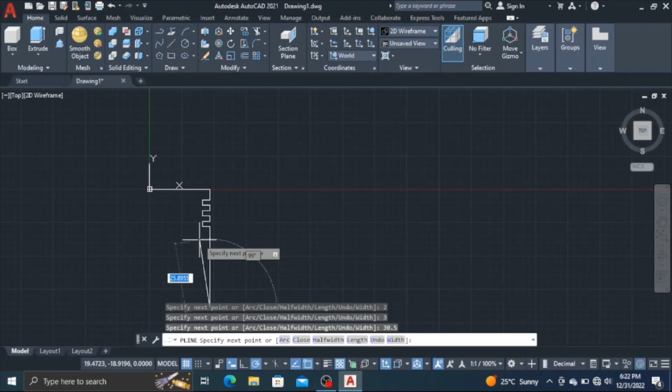Now bring it to the origin and slowly move down for the visibility of the tracking vector, but don't click until both tracking vectors appear. Click, and then click on the origin. Then press enter to exit the command.

Now we are going to use the fillet command. Enter radius 1, press enter, and select the lines you want to fillet. Then go to the modify panel and click join to join the whole geometry into a single polyline.

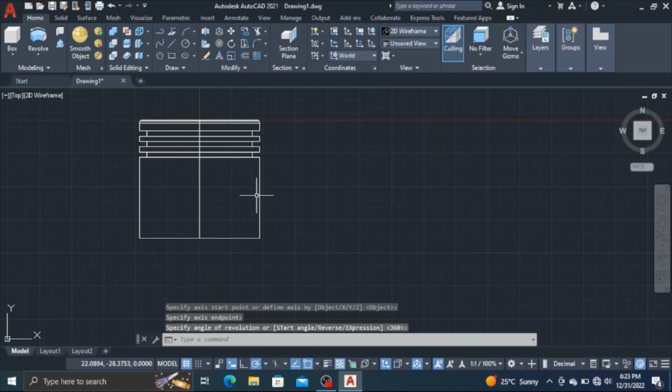Now go to the revolve command, select the object, press enter. Now specify the first point, click, and then on the second point click, and press enter. Now we don't need this geometry, so we are going to hide it.

Now again go to the polyline command, enter coordinates 0,0 to start from the origin. Now bring it downward for 4 units, and then to the right for 18 units, and then again downward for 12 units.

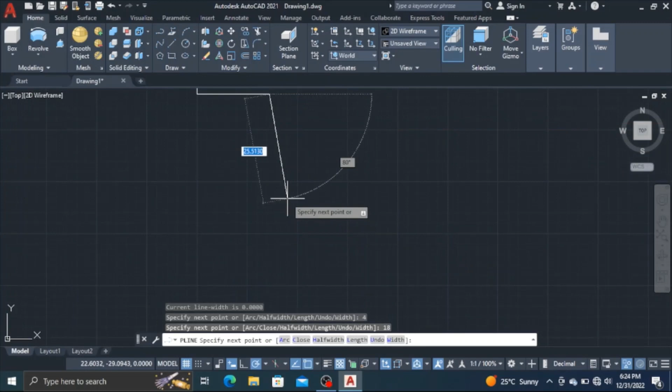Then left for 8 units, then again down for 12 units, and then to the right for 10 units. Now bring it down up to 4 units, and then 1 unit to the left, and 1 down, and 1 to the right. Now bring it all the way downward up to 30 units.

Now again move it to the origin for the visibility of the tracking vector. Move it down slowly and click, press enter.

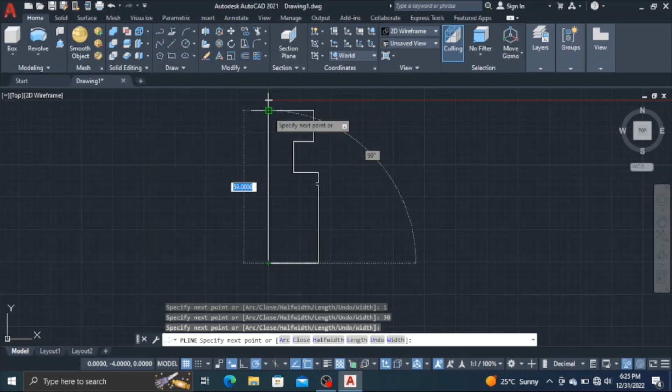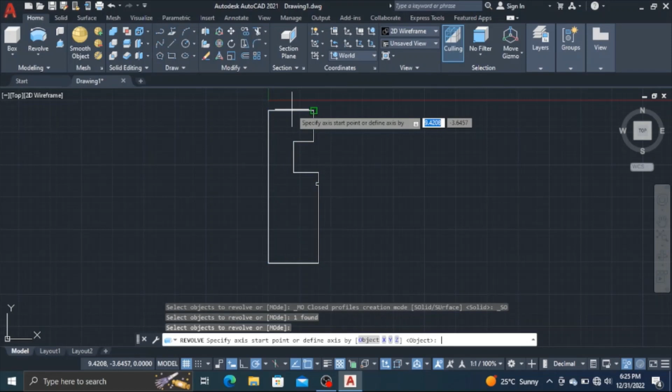Now you are going to use the trim command, press enter, click. And now we are again going to use revolve. Select the object, press enter. Now specify the initial point, click, and now the end point.

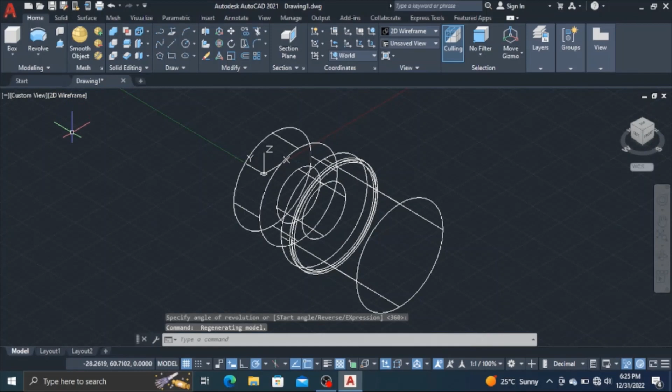Click and press enter. Now go to the home button. Change this 2D wireframe into shaded. Turn off the grid because we don't need them, and end the object isolation. Now we need to subtract this geometry from this geometry. So press enter.

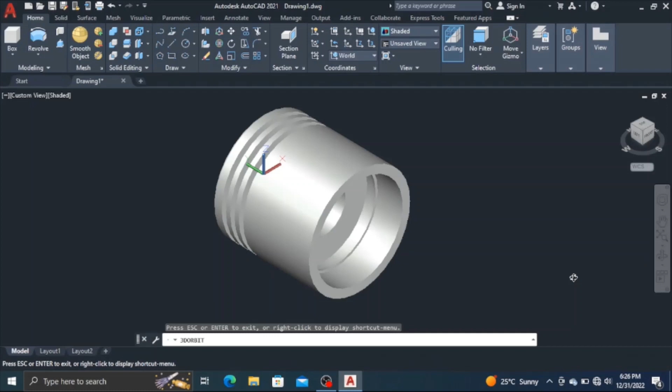Now this really looks like some piston, but we have not done yet. Now go to the top view, select the object and again hide it because we don't need it at this time. Now again go to the polyline command, enter 0,0 to start from origin, bring it all the way downward.

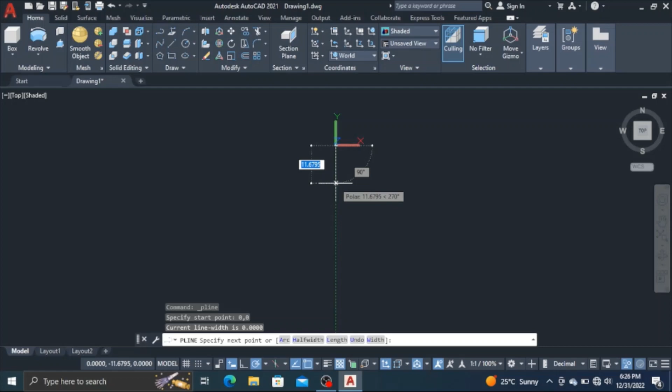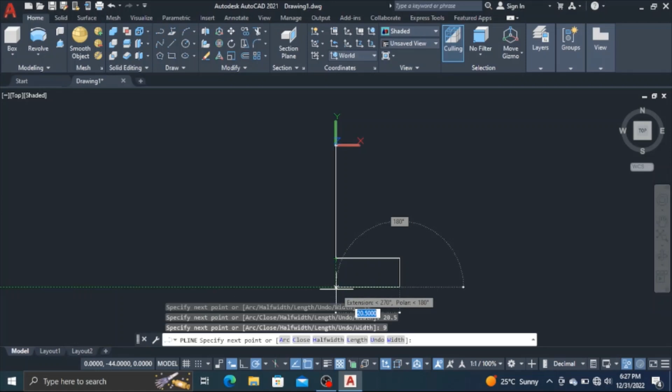Up to 35 units, and then towards the right for 20.5 units. Press enter and now down for 9 units. Press enter. Now go for the tracking vector, click and then click, and press enter. Now we are going to use the trim command.

Click on the trim command and press enter, and click on the line. Then we are going to use the fillet command. Click on radius, enter 9, press enter. Now we want to fillet these two lines, so simply click on these two lines.

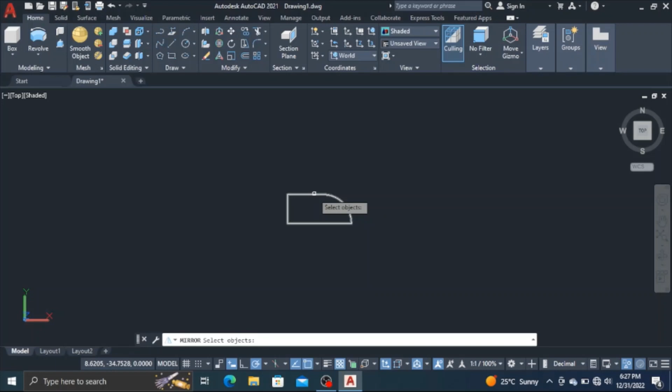Now we are going to make a mirror image of this drawing geometry. Select the geometry, press enter. Specify the initial point and end point and press enter. Now go to the trim command, press enter and trim the line. Click on the join command and join this whole line into a single polyline.

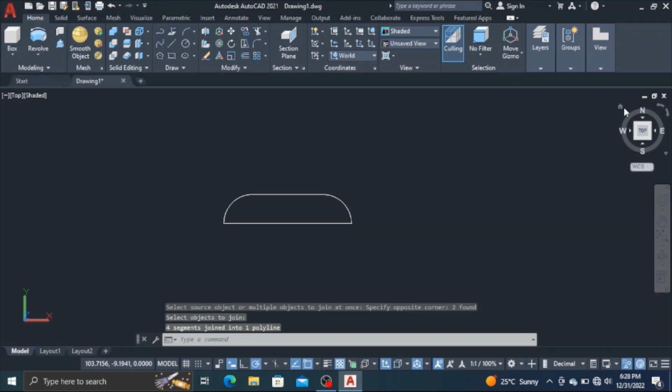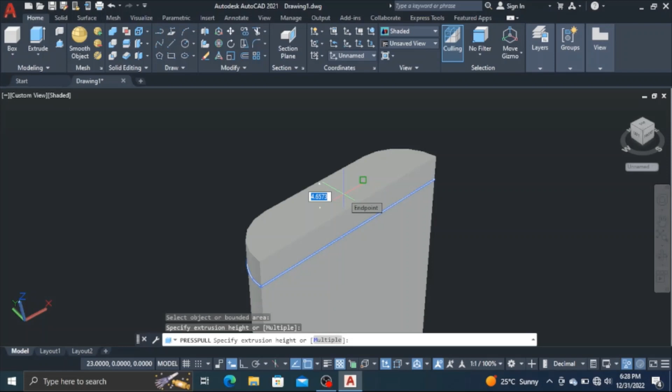Go to the home button. Click on extrude from the modeling panel. Select the object, press enter. And now enter the radius 50 but in negative, so we want minus 50, enter. Now go to the press pull, select the line and enter 50, and press enter to exit the command.

Now hide and end object isolation. We are not finished yet. Now go to the press pull command, select the line and enter 5 units. Press enter.

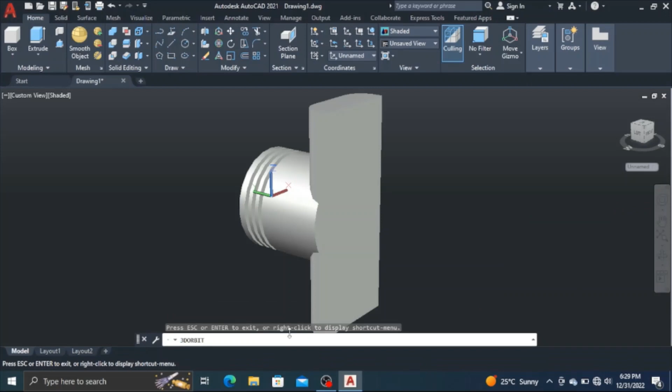Now we are going to subtract the lower part from the upper part. So go to the subtract command, select the piston head, press enter. Now select the lower part and press enter. So the final geometry will look like this.

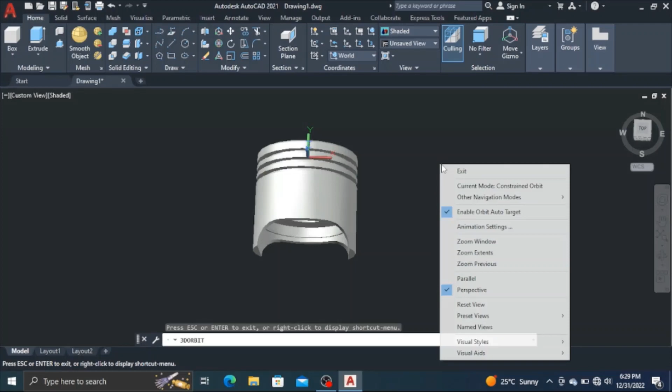Go to the top view, click on parallel for better view, and now click on rectangle from the draw command. By clicking the rectangle, specify the point at 21, 14.

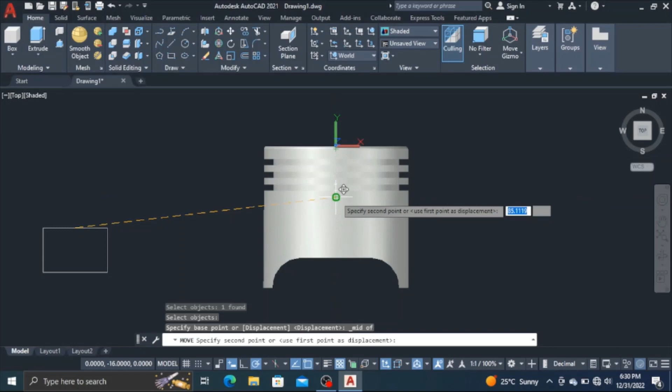Press enter. Now go to the move command from the modify panel, click the object, and now we want its middle point, so go to snap override and middle point. Now move it to the center of the piston, almost to the tracking vector. Just make sure it will lie in the center.

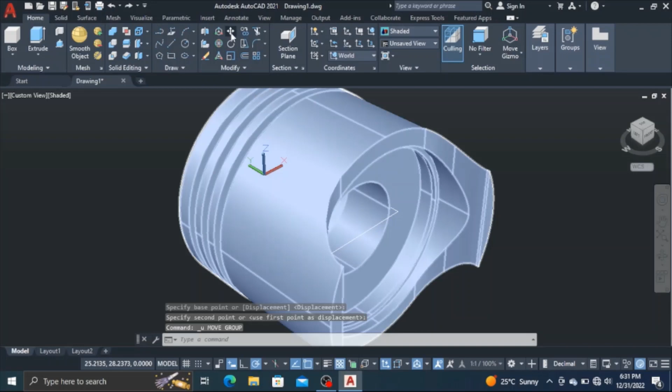Now go to the home button, and this is the rectangle which you have placed now. Now go to the move command again and move it upward up to 23.5 units. Go to the move command, select the object, press enter and move it up to this tracking vector for 23.5 units.

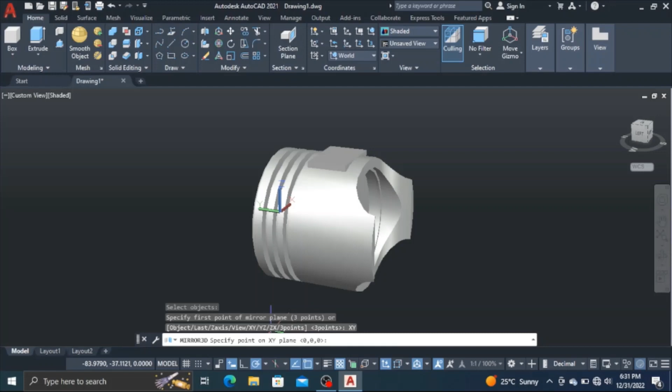Now we want this rectangle on the parallel side also. So go to the modify command and click on 3D mirror. Select the object, press enter and now simply click on XY on the command line. Press enter and again press enter. So now you can see that it will appear on both sides.

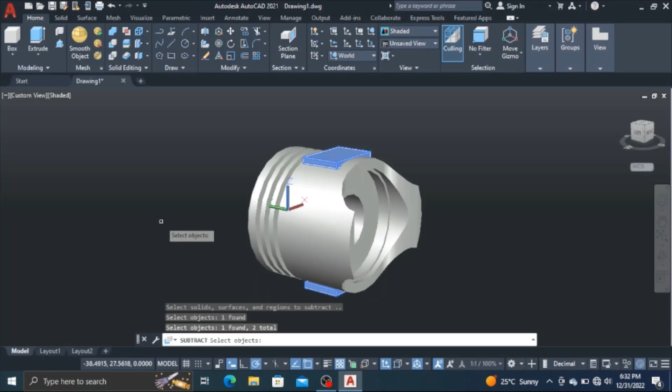The next step is to subtract this rectangle from the piston head. Select the piston, press enter. Select the rectangle and rectangle, press enter. Our piston head is almost ready.

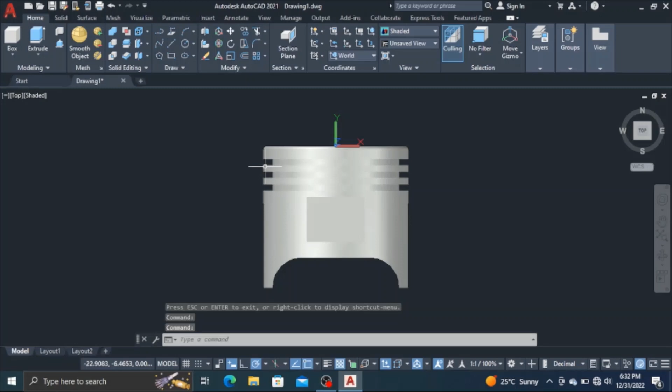The final step is that you have to go to the top view again, select parallel, go to the circle from our draw panel and draw a circle in this almost center of the piston head. And enter the diameter almost 9.

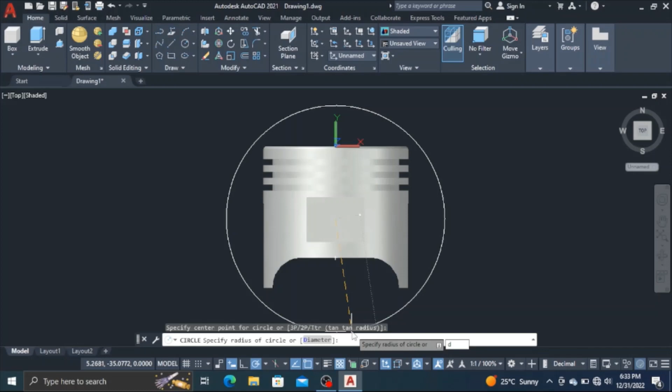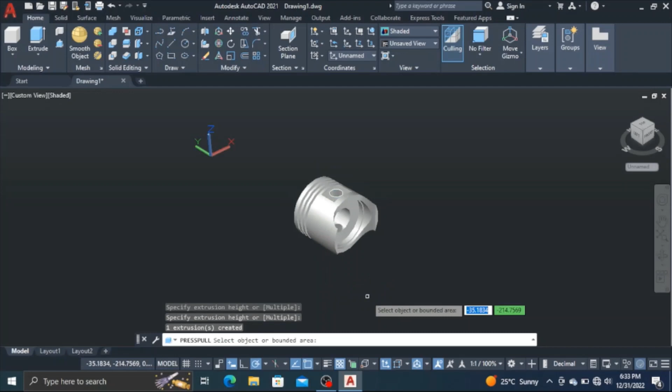And now we have to go to the home button again, select presspull. This time select the circle and bring it all the way downward, but don't click, simply press enter. And our final piston head is ready. It is now completed. So we have just completed a 3D drawing of the piston head.